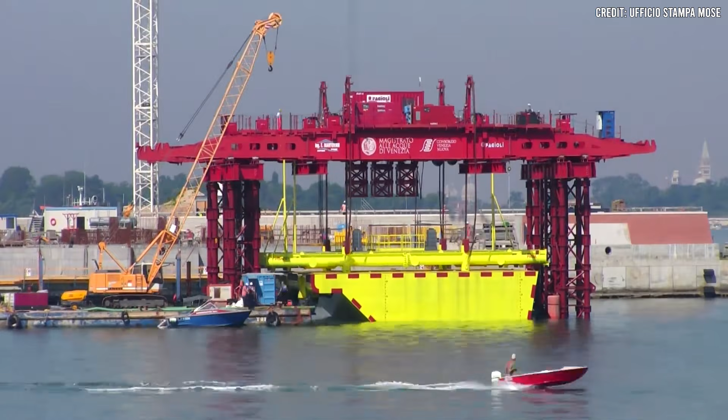And the multi-billion euro system designed to stop exactly this? It sat on the seabed, unfinished, years behind schedule, and tainted by one of Italy's most brazen corruption scandals.

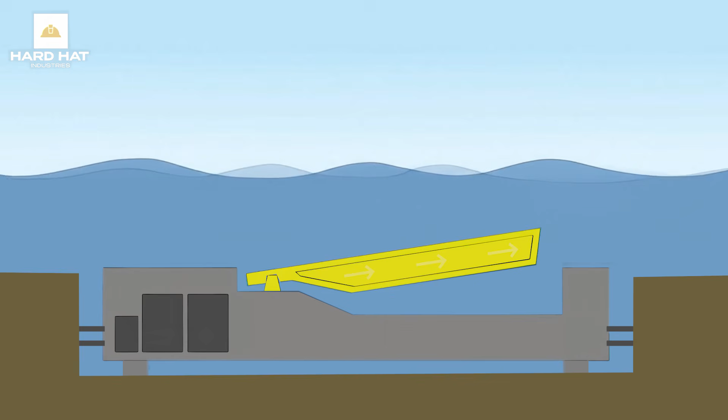This is the story of MOSE, a 6 billion euro flood barrier that took over 20 years to build, was nearly killed by a 21 million euro bribery ring, and now faces a problem its designers never fully anticipated. It's working, but it might be working too much.

You see, Venice doesn't sit beside the sea in the traditional sense. It sits inside a lagoon, a shallow body of water separated from the Adriatic Sea by a series of narrow barrier islands. 3 inlets, Lido, Malamocco, and Chioggia, act as gateways between the open ocean and the lagoon. When the tide rises, water rushes through these 3 openings and floods the lagoon basin.

When conditions align, southerly winds from the Adriatic, known as the Scirocco, push enormous volumes of water toward the coast, and that water has only 3 places to go. The result is acqua alta, literally high water, and it's been plaguing Venice for centuries.

But here's what's changed. The frequency of tides exceeding 110 centimeters has increased dramatically, from a few per decade historically to dozens in recent decades. The trend is accelerating. Venice's problem isn't just rising seas. The city itself is sinking.

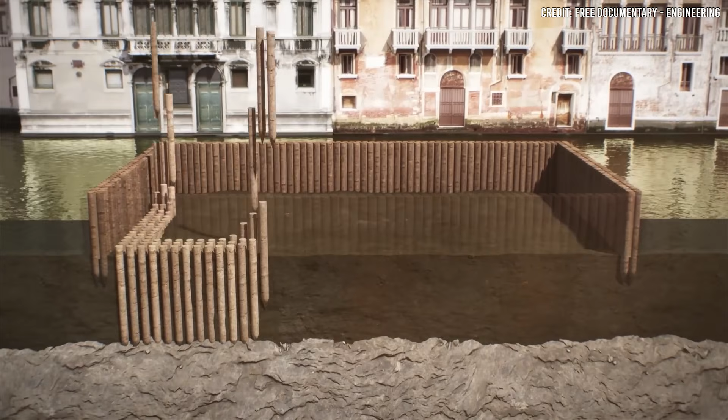Built on millions of wooden piles driven into soft sediment, Venice has been subsiding for centuries. Industrial groundwater extraction in the 20th century made it dramatically worse. The pumping was eventually stopped, but the damage was done. The city dropped by roughly 25 centimeters over the last 100 years.

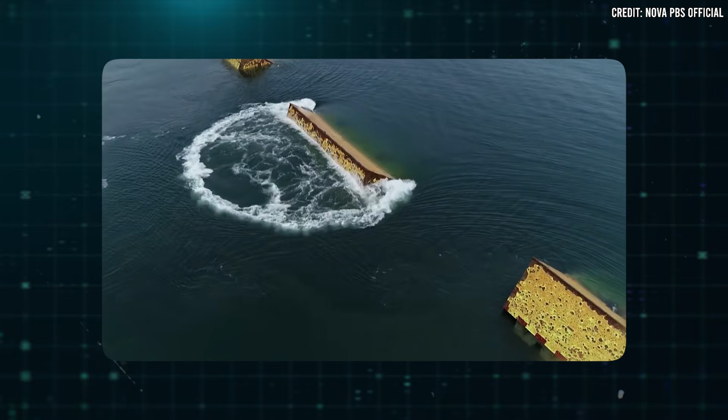Combine that with Adriatic sea level rise, and you have a city caught in a vice, squeezed from above and below simultaneously. By the early 1980s, the Italian government recognized that something radical had to be done. That something would become one of the most expensive, controversial, and technically audacious flood defense systems ever attempted.

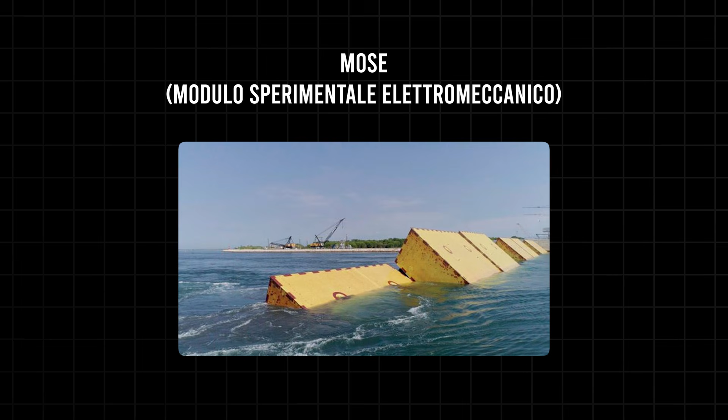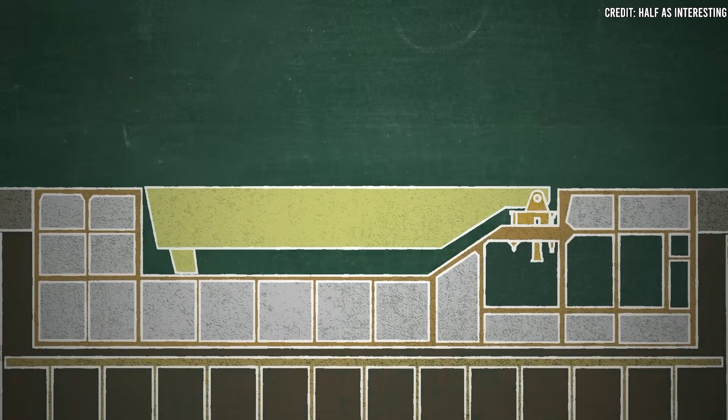MOSE, which stands for Modulo Sperimentale Elettromeccanico, was conceived in the 1980s and formally approved in 2003. The concept was elegant in principle. Engineers would install rows of hollow steel gates across all 3 inlets connecting the Adriatic to the Venetian lagoon, 78 gates in total. When tides were normal, the gates would lie flat on the seabed, completely invisible, allowing ships, tidal flows, and marine life to pass freely.

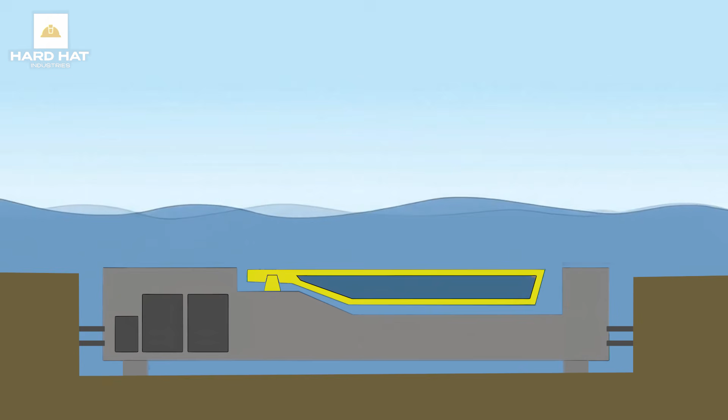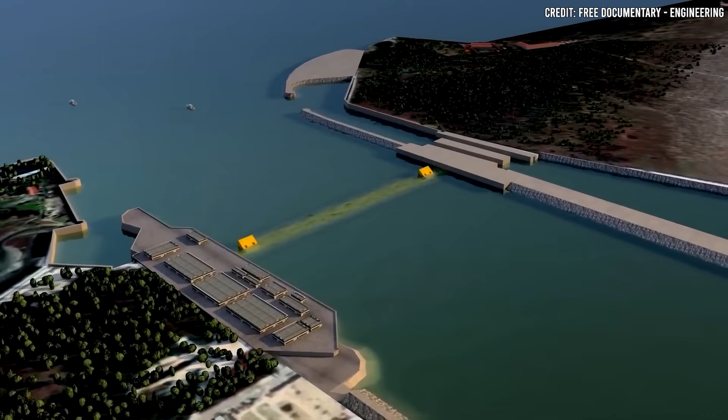When dangerous tides were forecast, compressed air would be pumped into the hollow gates, forcing out the water inside them and causing them to rise like hinged flaps until they formed a continuous wall across each inlet. But turning that concept into reality required construction on an almost absurd scale, much of it underwater.

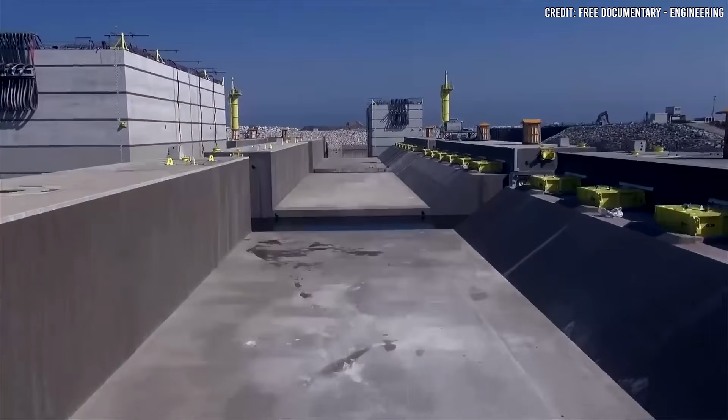The first challenge was building the foundations. Each gate needed to be hinged to a massive concrete housing structure sitting on the lagoon floor. These housings, essentially enormous concrete caissons, had to be fabricated, transported, and sunk into precise positions on the seabed.

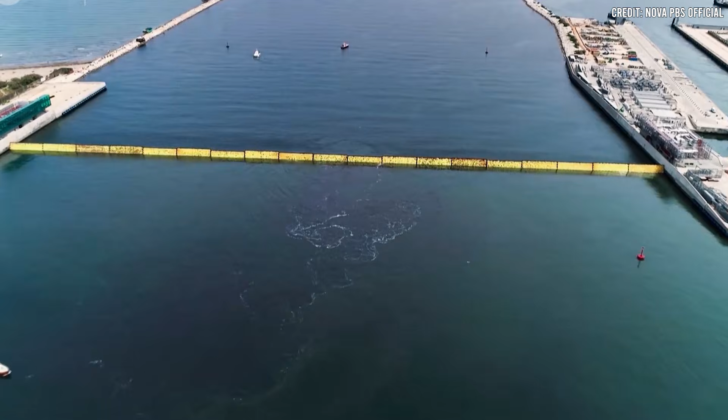Workers dredged and leveled the inlet floors, then placed the caissons into prepared trenches. Each one had to be aligned to millimeter tolerances, because the gates needed to form a continuous, watertight barrier when raised.

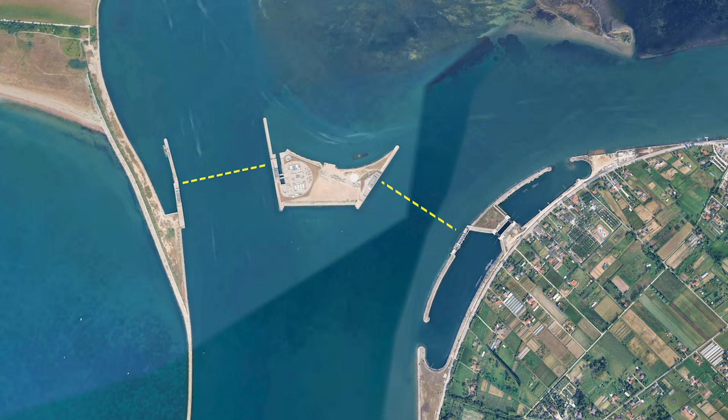At the Lido Inlet alone, the channel was so wide it required 2 separate barrier rows with an artificial island built between them to anchor the system. That island didn't exist before MOSE. Engineers constructed it from scratch in the middle of the lagoon, creating a new landmass to serve as a hinge point between the northern and southern gate arrays.

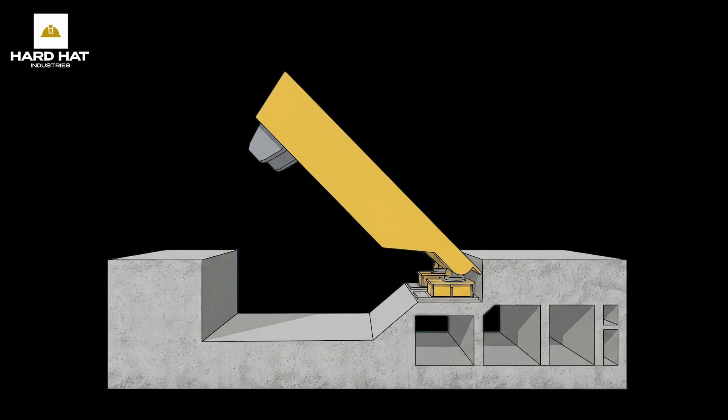The gates themselves are steel box structures, each one between 20 and 30 meters wide, roughly 20 meters tall, and up to 5 meters thick. They weigh approximately 300 tons each. When resting on the seabed, they sit inside their concrete housings and are filled with water, holding them flat.

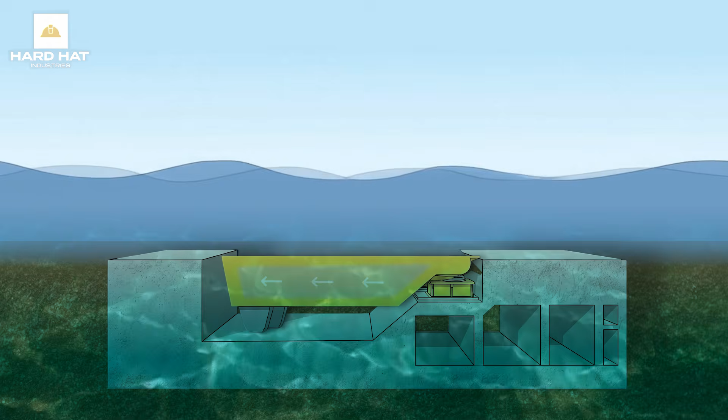To activate them, compressed air is fed through pipes running from onshore plant rooms, displacing the water and causing the gates to pivot upward on their hinges. It takes about 30 minutes to raise the full barrier system.

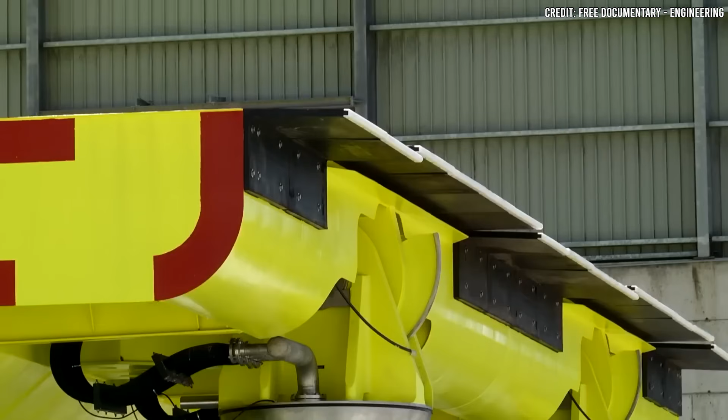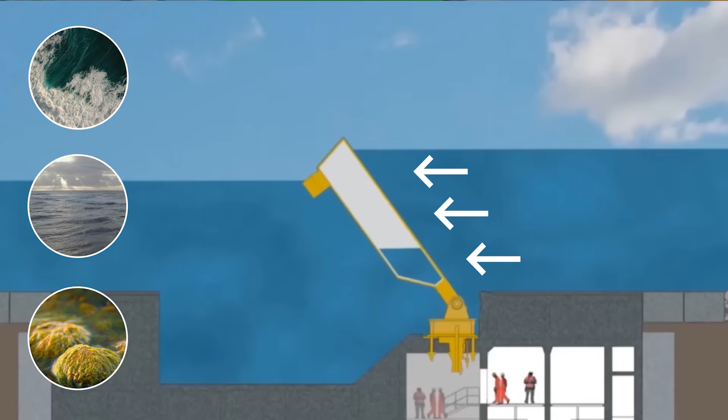Now, everything about this process had to function in an extraordinarily corrosive environment. Salt water, constant tidal movement, biological fouling from barnacles and algae, and the sheer pressure of the Adriatic bearing down on the structures. The hinges connecting the gates to their housings are permanently submerged, and after years underwater, engineers have already observed corrosion on several of them, raising serious questions about long-term durability.

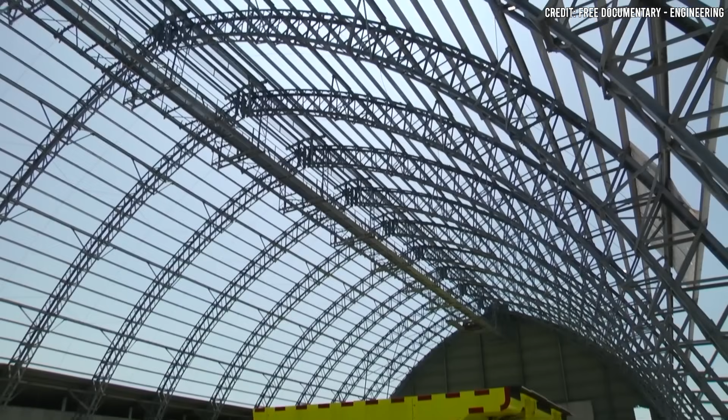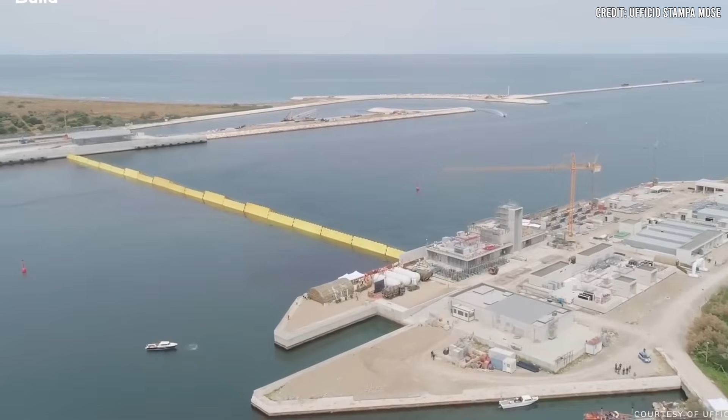The final gate was laid on January 30th, 2019, 16 years after construction began. The original completion target had been 2011. The original budget had been roughly 1.5 to 1.9 billion euros. By the time MOSE was anywhere near operational, costs had ballooned past 6.2 billion euros, making it one of the most expensive flood defense systems in human history.

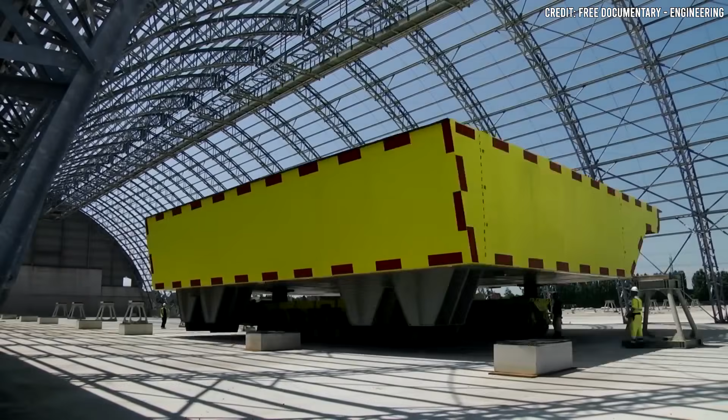And that brings us to the scandal that nearly sank the whole project. In 2014, Italian authorities dropped a bombshell. Venice's mayor, Giorgio Orsoni, was arrested alongside approximately 30 other officials and business people in a sweeping corruption investigation centered on MOSE. Prosecutors alleged a web of bribery, fake subcontracting, and systematically inflated contracts stretching back years.

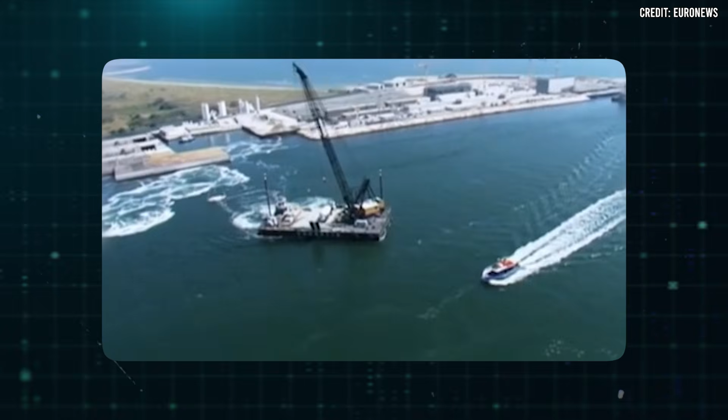The numbers were staggering. Over 21 million euros in assets were eventually confiscated. Investigators uncovered 22 million euros in bribes and so-called gifts funneled between the consortium building MOSE and the politicians overseeing it. Contracts were padded, subcontractors were invented on paper, and public money was siphoned off at virtually every level. Giorgio Orsoni was one of 30 people accused of financing election campaigns with bribes of 25 million euros from the group building the city's flood barriers.

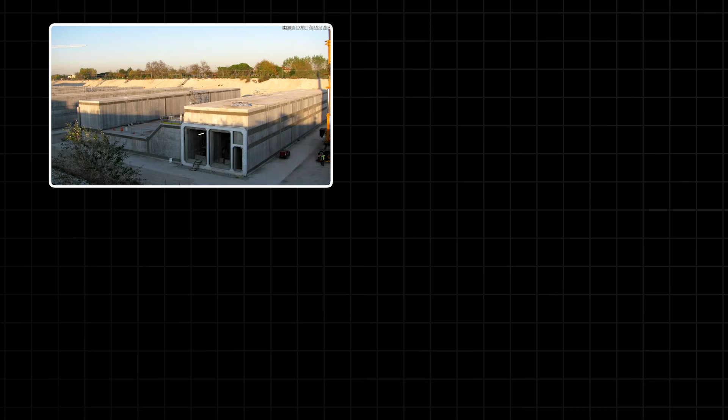For Venetians, it was a gut punch. While their city flooded, while billions were supposedly being spent to protect it, a significant chunk of that money was lining pockets. The scandal became a symbol of everything wrong with Italian megaproject governance, a cautionary tale about what happens when oversight fails on a project this large and this urgent. Construction slowed, public trust evaporated, and the Adriatic kept rising.

On October 3, 2020, MOSE was activated for the first time in a real flood event. The barriers rose from the seabed and held. Venice stayed dry. It was, by any measure, a triumph. After decades of delays, billions in overruns, and a corruption scandal that threatened to kill the project entirely, the system worked. During those first 3 operational winters, the barriers were raised around 50 times, shielding Venice from the kind of devastating floods that had submerged it in 2019.

Piazza San Marco, which had become a symbol of Venice's vulnerability with images of tourists wading through knee-deep water, stayed dry when MOSE was raised. Shopkeepers who had lost thousands in flood damage finally had protection. The engineering, for all its troubled history, delivered.

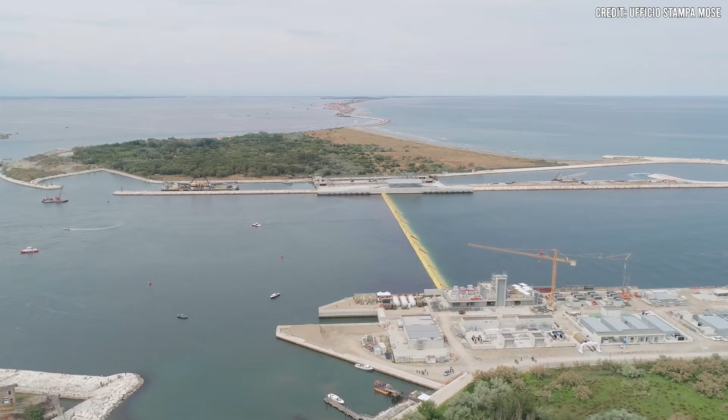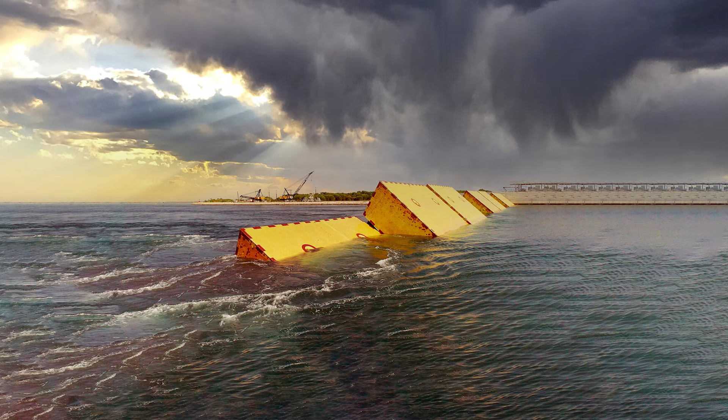But here's where the story takes a turn that MOSE's original designers may not have fully anticipated. The system was designed for exceptional events, rare extreme tides that might threaten the city a handful of times per year. It was never intended to be raised constantly. And yet, that's exactly what's happening.

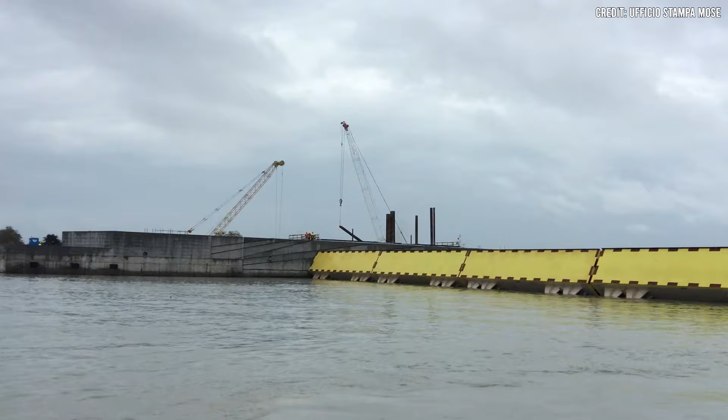Since going live in October 2020, MOSE has been activated dozens of times annually in recent years. In its early years, it was raised perhaps 5 times annually, but the frequency of activations has shattered every assumption about how often this system would need to operate. Each activation costs roughly 200,000 euros to the Venice port community alone, and the economic toll of frequent closures continues to mount.

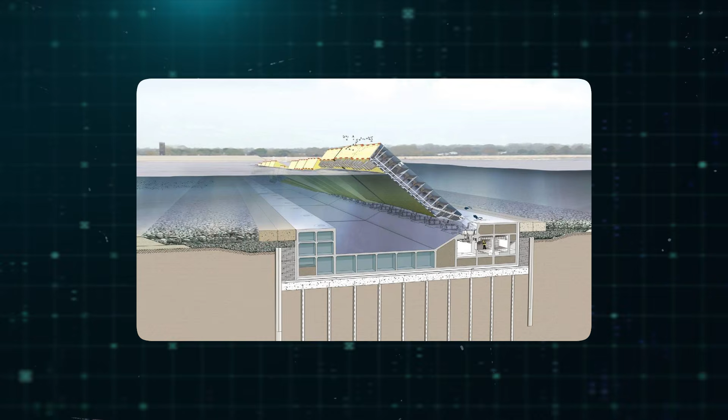The warning from experts is blunt. Under high-emission scenarios, within 30 years, MOSE may need to be activated daily. Now, think about what that means. A system with permanently submerged hinges already showing corrosion. Maintenance costs that have ballooned from initial projections of 10 million euros per year to 100 million euros.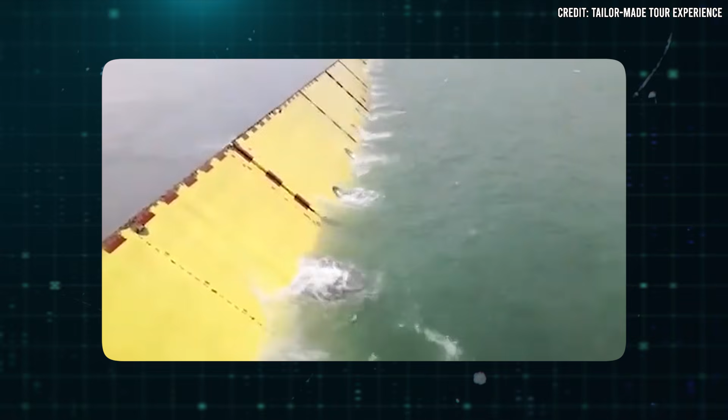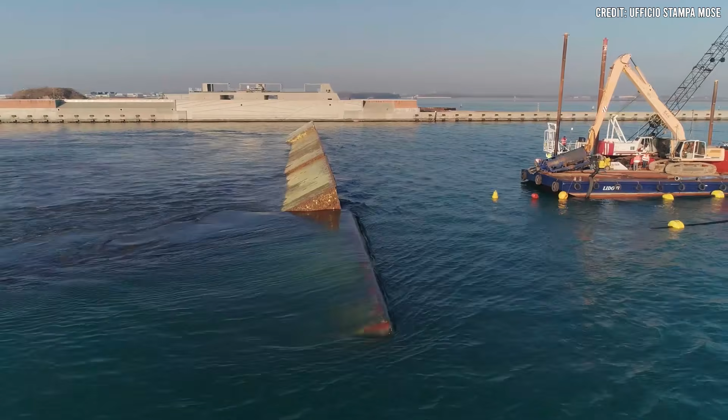And under high-emissions climate scenarios, researchers project MOSE could be active up to 260 days per year by the end of the century. A flood barrier designed for emergencies is becoming a permanent wall. And this is where MOSE's success becomes its biggest problem. Every time the barriers rise, the 3 inlets between the Adriatic and the lagoon slam shut. That stops the flooding, yes, but it also stops the tidal flushing that the entire lagoon ecosystem depends on.

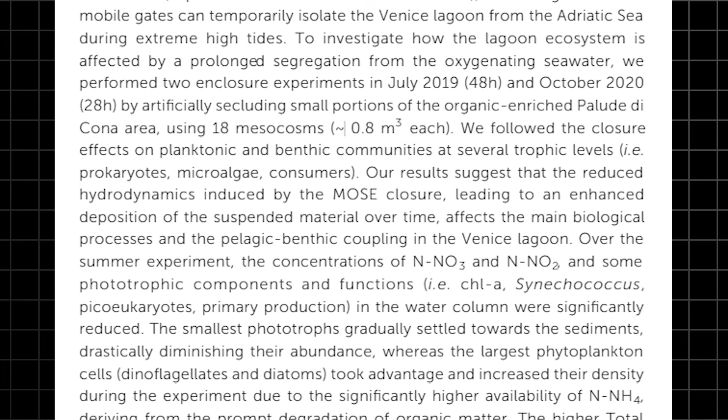A 2024 study from the University of Padua found that MOSE closures are already limiting the flooding of salt marshes, which are critical habitats ringing the lagoon. These marshes rely on regular tidal inundation to deposit sediment, and that sediment is what allows the marshes to grow vertically and keep pace with rising seas. Cut off that sediment supply and the marshes drown anyway, just more slowly.

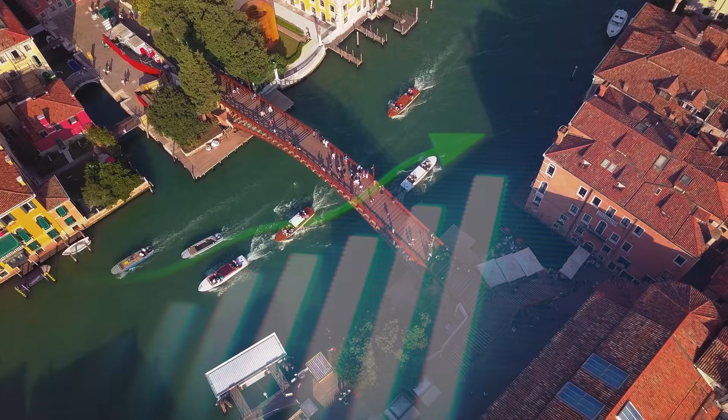Water renewal times inside the lagoon have already increased, exceeding 11 days in some sections. Stagnant water means reduced oxygen, algal blooms, and degrading conditions for the fish, shellfish, and bird populations that depend on a healthy lagoon. Winter closures cause less biological damage because marine activity is lower, but as closures creep into warmer months, the ecological costs will multiply.

Each closure also disrupts shipping traffic and port operations. Venice remains a working port, and every barrier activation halts vessel movement through the inlets. As closures become more frequent, the economic ripple effects compound.

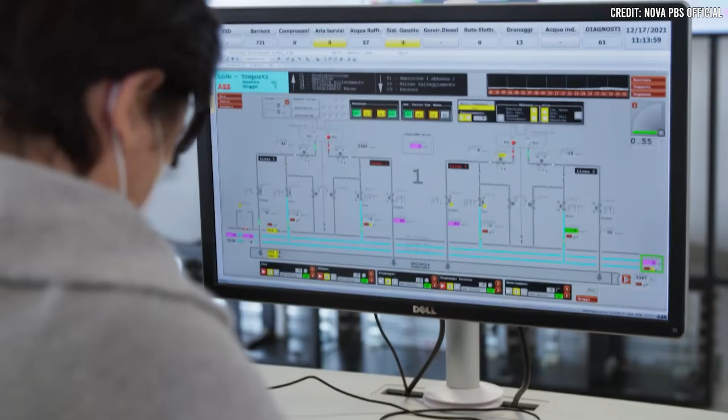So what comes next? Some researchers have proposed something that sounds almost absurd: physically lifting Venice. The concept, floated by Italian scientists, involves injecting seawater into deep aquifers beneath the city to cause the ground to swell, effectively raising Venice by approximately 30 centimeters. The researchers argue this could buy the city 20 to 30 years of breathing space, time to develop more permanent, adaptable solutions. It hasn't been attempted.

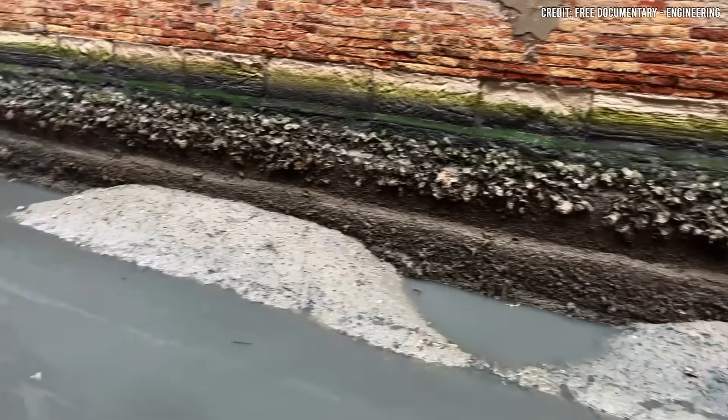The risks are enormous. Uneven lifting could crack foundations, damage the very buildings it's trying to protect, and destabilize the sediment Venice already sits so precariously upon. But the fact that serious scientists are discussing it tells you everything about the desperation underlying Venice's situation.

MOSE bought time. Nobody disputes that. The 2019 flood would have been significantly less devastating had the barriers been operational. The early winters of activation proved the engineering works, but a flood barrier designed for a handful of annual emergencies is now grinding toward daily use, and the city it protects continues to sink while the sea continues to rise.

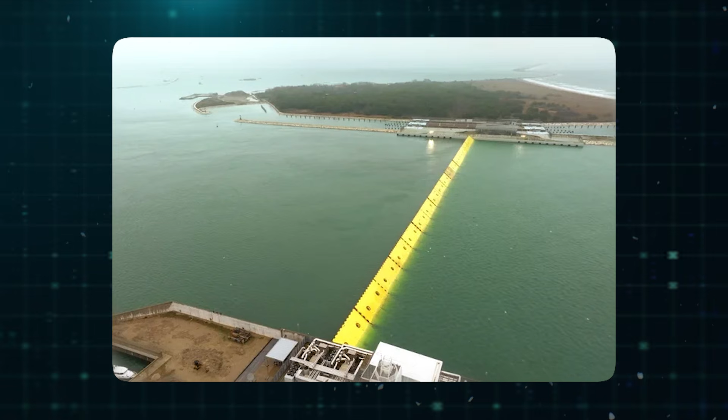Venice exists in this strange twilight. The most visited city in Italy, a UNESCO World Heritage Site, a place that generates billions in tourism revenue, is also one of the most vulnerable inhabited places on Earth. MOSE was supposed to be the answer, and for a time, it looked like it might be. But the maths hasn't changed.

Several millimeters of relative sea level rise per year, hinges corroding underwater, maintenance budget swelling by a factor of 10, an ecosystem being slowly strangled every time the gates go up. And under high-emission scenarios, a climate trajectory that could demand those gates stay up more days than not.

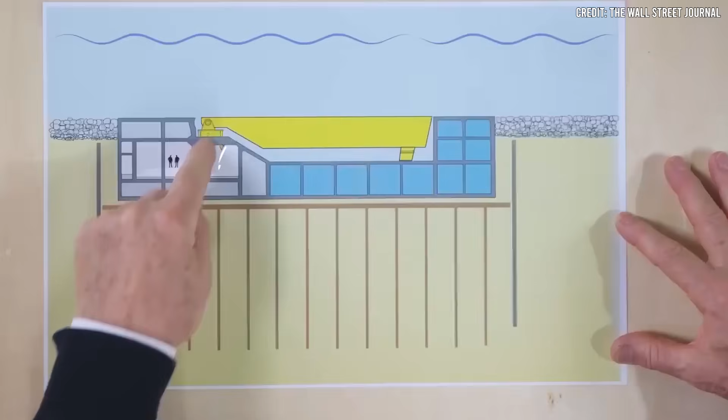The 6 billion euros question isn't whether MOSE works. It does. The question is whether a system designed for a 20th century problem can survive a 21st century reality. Whether the most expensive flood defense ever built is a bridge to a more permanent solution, or simply a very costly way of delaying the inevitable.

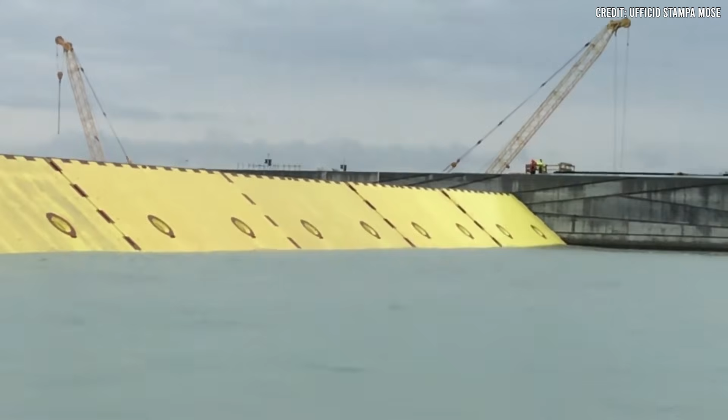More than 40 years after MOSE was first conceived, through corruption and scandal, engineering triumph and ecological consequence, Venice remains locked in a race it cannot afford to lose. The barriers rise, the water retreats, and for another day, the city survives. But the tide is patient, and it always comes back.